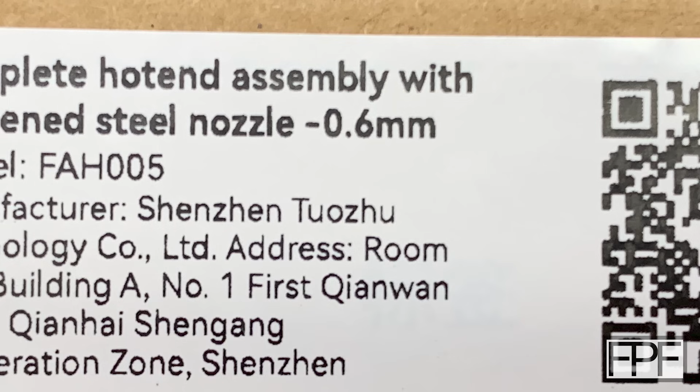Sorry, got a little carried away there.

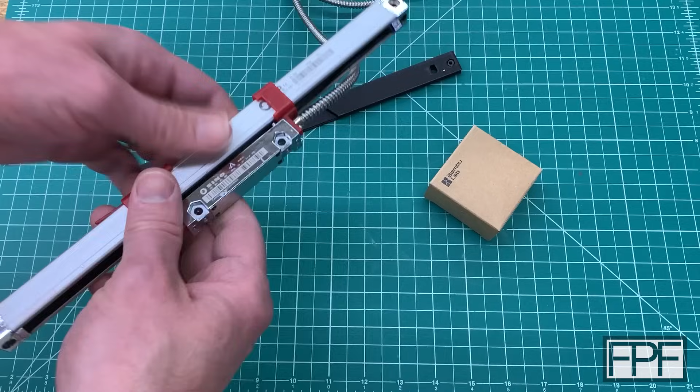But the part to mount the read head, which is this piece down here, it basically allows mounting from this face carried down to the casting on the lathe. It won't stick. So once again, let's set this and all the frustration that comes along with it aside and instead focus on something else.

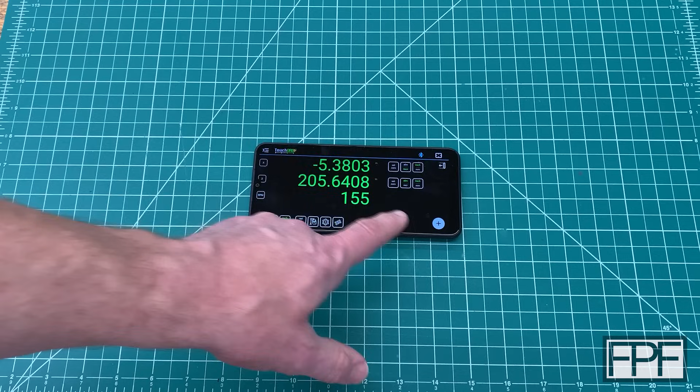All right, this is the display that I want to use for the DRO on the lathe. It's actually just a cheap Android smartphone. TouchDRO, to be fair to them, does recommend a larger display than this, but this appears to be working just fine. You do in some instances have to scroll, like up here for your saved points. You actually have to scroll to get to the delete icon, which is kind of annoying, admittedly. I wish you could reorder those. But aside from that and the small screen for typing in measurement changes, it actually seems to be working really well. So I think I'm going to try and go with this just because I've already got it.

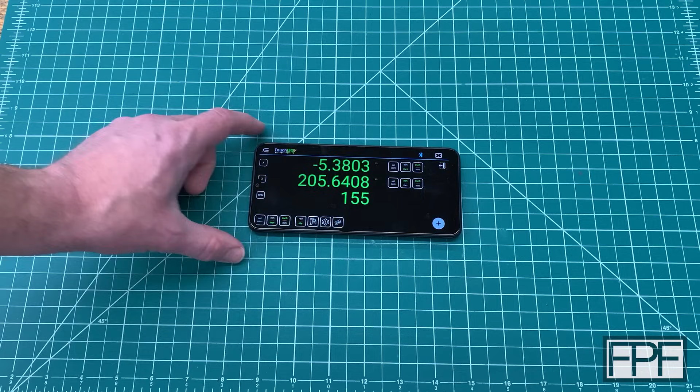But it's not doing any good sitting here on the workbench, nor will it be much more useful just sitting on top of the gearbox on the lathe. So let's go figure out how we can actually get this mounted up to the lathe.

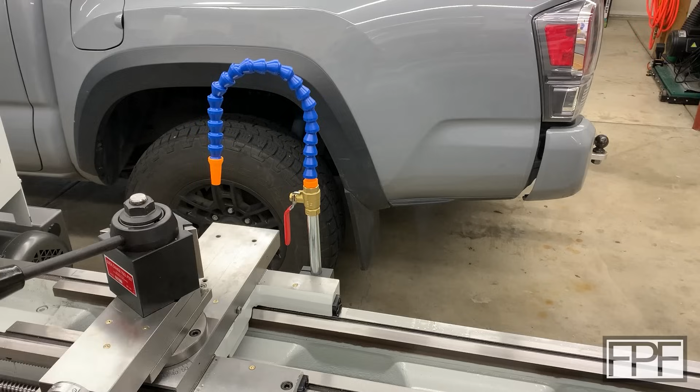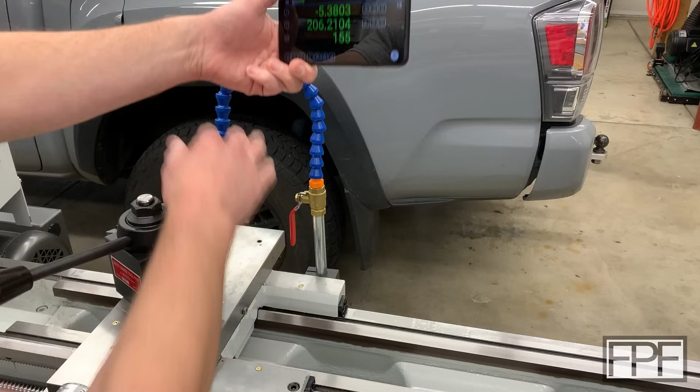Okay, so we're over here at the lathe, and this is the carriage. This is the part that moves back and forth, and moving along with it is our plumbing here for the coolant on the lathe. Now, this isn't something I frequently use, but I do certainly want to keep it there. But what I'm thinking about is, what if we just added the screen kind of right up here next to it? We can't attach it to this, but I don't see any reason why we couldn't have it sort of right up next to it.

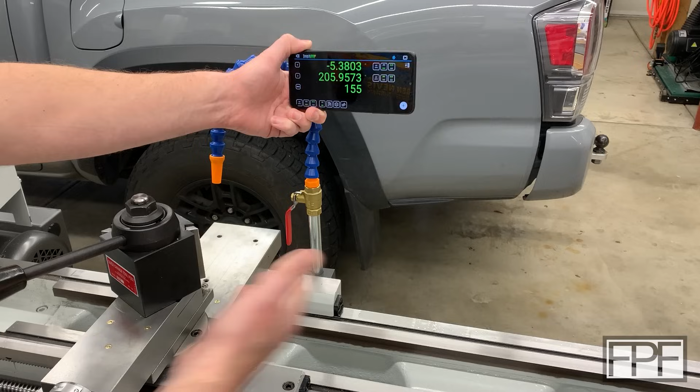And then this would also move along with the carriage. So whether we're cutting all the way up at the chuck, or we're all the way down here doing a long threading operation, or some other operation on a much longer piece of material, we'll still have all the information that we need right in front of us.

Okay, so around the back here, you can see how this guy is mounted. It's basically just clamped in there. We have a piece here with 2 bolt holes, and it is slit on this side, and this just tightens up and holds this pipe in place.

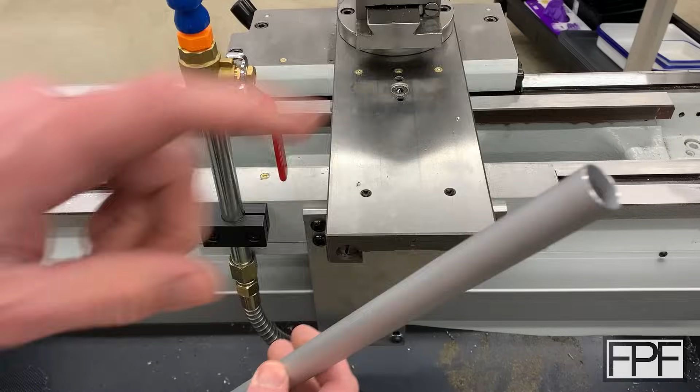Well, I found this piece of hollow aluminum tubing. I probably salvaged this from a broom or mop or something we were throwing out. I've already cleaned up the ends, so it's nice and beveled and straight on both ends. This end is actually a little bit thicker, it's tapered. It also had a hole through it. I cut all that off, but I left a little bit of the taper, thinking that might be useful in our design.

I'm thinking, what if we just design a bracket or a clamp, similar to this one that just has 2 holes in it. I think we could come off this side, maybe have a hole to accommodate this guy here. We're obviously not going to have room for another bolt hole, but I don't think we need it. I think if we just run the slit all the way through from this end, connecting through 2 holes, and have it solid over here, we'll still be good with just 2 bolt holes, because this bolt would end up clamping both of these, but more so this one, and then this one would clamp this in tight. I think, at least.

Anyway, I haven't 100% thought that through, but let me go up and see what I can come up with from a design perspective for this. I want to see if that's going to work before we go any further, but obviously then we need to figure out a way to actually attach the phone onto this end of the pole, because you guys know I'm not going to just hot glue it or duct tape it up there.

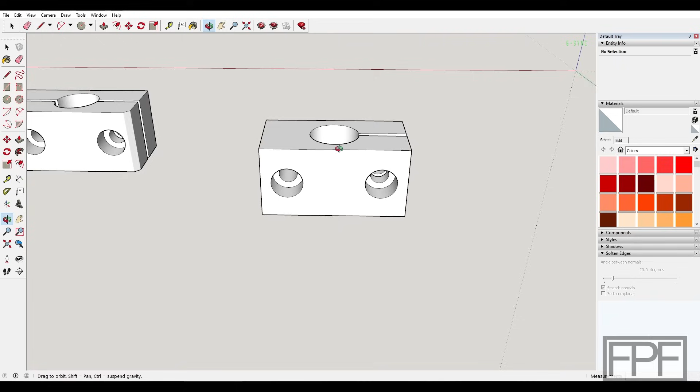All right, and here is the design that I came up with for this. The first thing I did is actually just draw the piece that's already on the machine. I took it off, brought it up here to my desk where I could easily measure it and draw it out. This is dimensioned exactly the same as that stock piece.

I then took that and used it as a basis to design a longer version of this with a second hole. I think this one's 17 millimeters, this one's 19 millimeters, as those pipes are slightly different sizes, and then slit it all the way through.

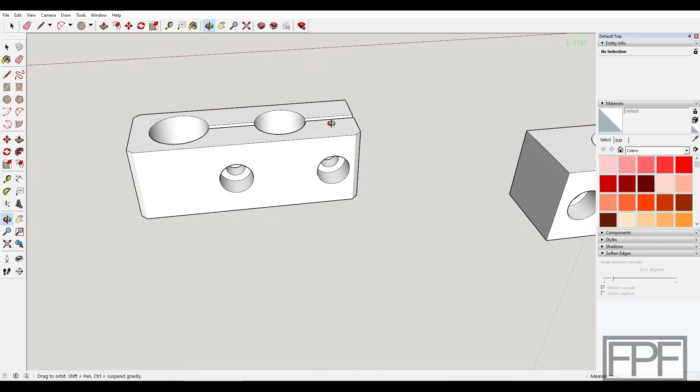I don't know for sure that this is going to work. I don't see any reason why it wouldn't. As long as this hole is a tight enough dimension, since we're hinging on this end, when we squeeze this shut, I would think both of those pipes should be clamped tightly in there. But I guess the only thing to do is print it out and find out. So let's do that.

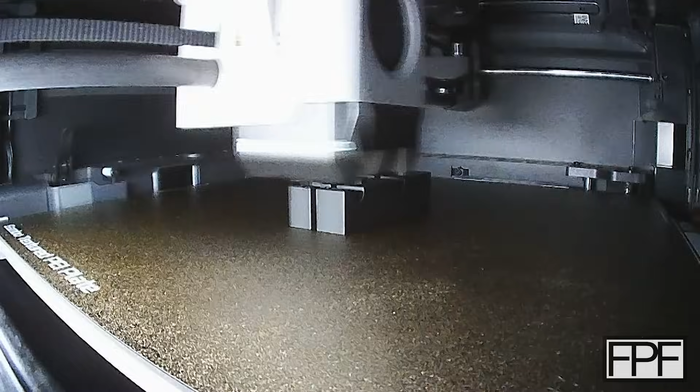All right, and that came out really nice. This is just in plain old PLA. This is so easy to get to. If I ever do actually have a problem with this part getting eaten up from oil or coolant on the lathe, it'll be really easy to replace. But my guess is I will probably never replace this piece as long as it does actually work.

So let's see if our tubing fits in it first. I know one end of this is tapered. Yeah, I think the end with the scratches on it is the end that's not tapered, so it should slip through here. Ooh, it's a little snug. Oh, there we go. If I just open it just a little bit, it slips right in. All right, that looks good.

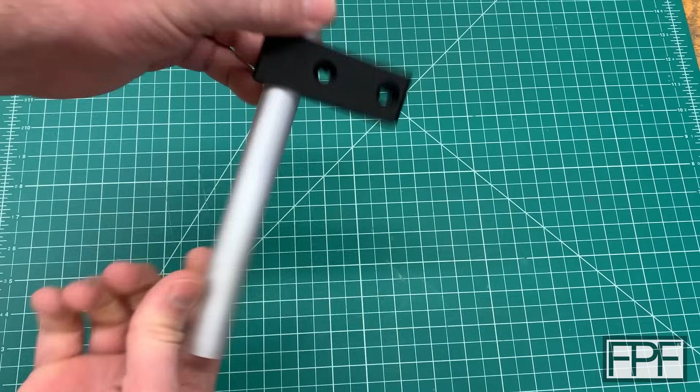Now, does our taper serve a purpose? Yes, you can actually see it's stopping right there. That taper is quite subtle, probably only maybe 5 or 10 thou. But it's enough that it gives us a stop, which is great, because if we keep this as the bottom end, we'll have adjustability to raise this guy up, but it'll stop short of actually coming out of this clamp. So, all right, we got to see if our other pipe fits in here as well, and then if this is actually going to pinch both of those with still only having those 2 bolt holes.

So let's go back over to the lathe and get this guy mounted up.

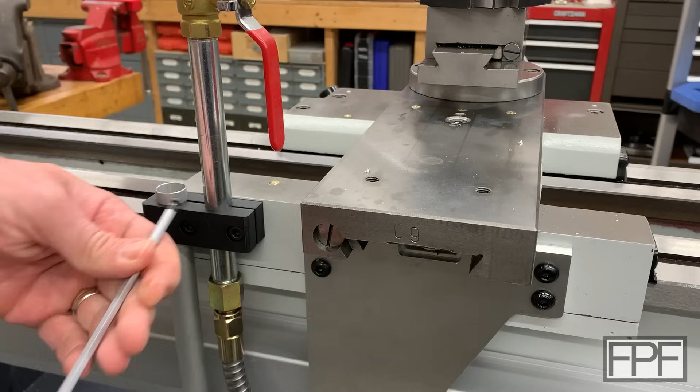All right, that was almost too easy. That went on really nicely, and I do actually have adjustability on each side. You do have to loosen up each side a little bit first if you want to adjust one. Loosen up this one all the way if you want to slide this guy, or loosen up this one all the way to slide the other. So that actually works pretty well.

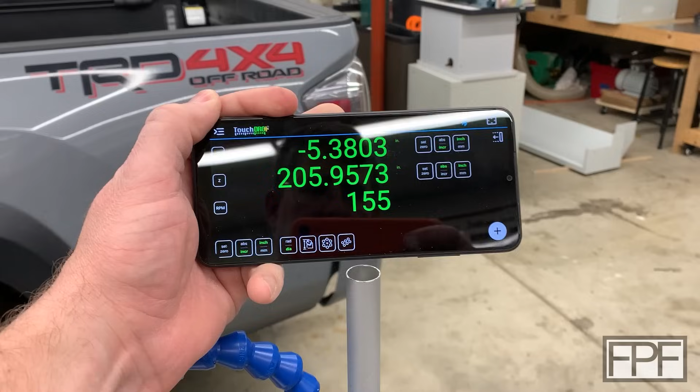All right, and back around at the front, looks pretty good from up here too. So now we just need to figure out a way to get this mounted up on top of this pole. And I do already have an idea for that.

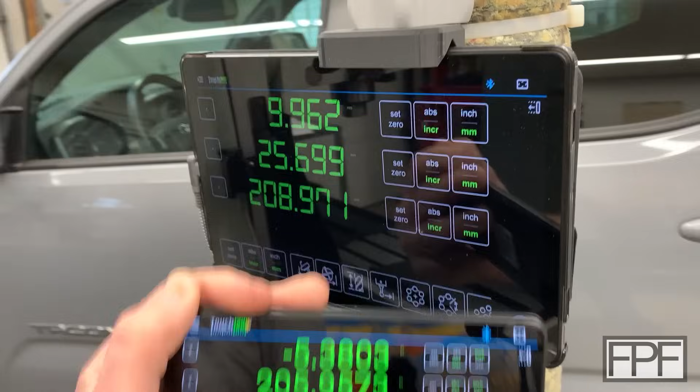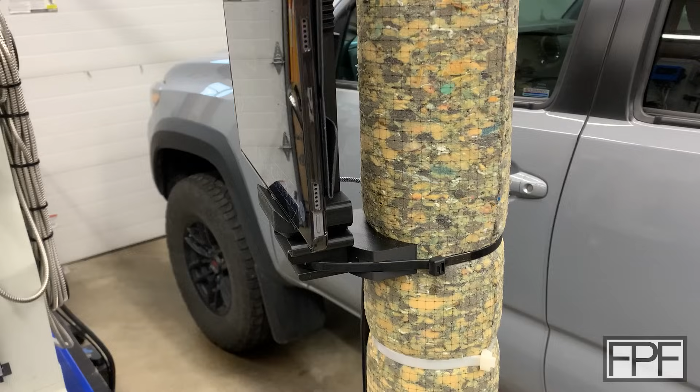Let me show you how I hold the one for the milling machine. The one over here is clearly much bigger, but I had taken a universal phone mount design and just made it substantially larger, making adjustments to allow us to mount with just zip ties to this pole. If you haven't seen that video, I'll link it in the description. But I think we're going to do kind of the same thing here, though we're not going to mount to the pole like this.

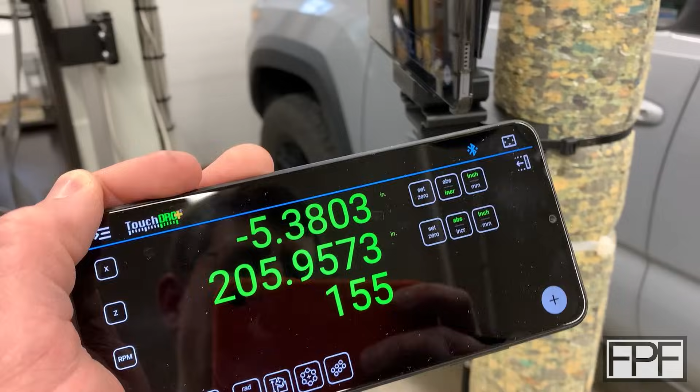I want to mount the pole at the bottom. This is much lighter, so we shouldn't have a hard time mounting right to the top of that pole by modifying the base. The stock design for the base of this just has a small slot to slip a nut into for a standard tripod thread.

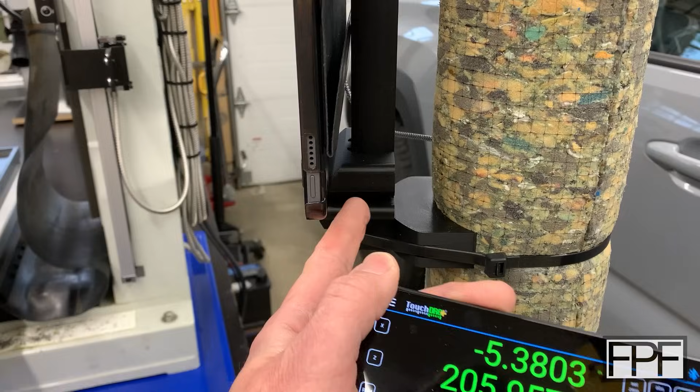It doesn't have a pipe mount at the bottom, so we're going to have to figure out how to adapt from that standard design to a pipe, and we'll have to make sure the whole thing is rigid enough as well. But let me go see what I can come up with from a design perspective, and I'll bring you guys back.